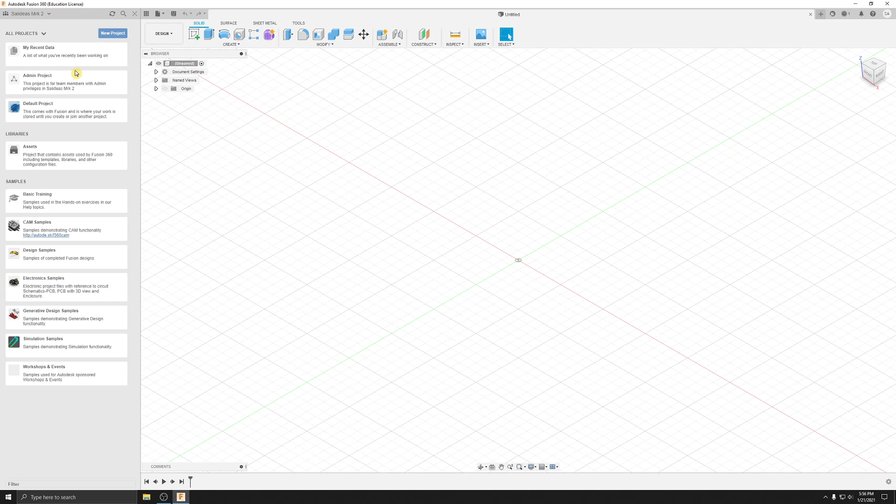progress. Okay, so how I have it here, I don't have this sidebar open yet to access the file from our previous lessons. I'm going to click here, show data panel, all the way on the top left corner, and then go into my project, and then open Arabic Design 1, Mark 1. Okay. Here's our design. Now we're finished with the design, extruding and making the sketch and everything. So we're done with that part.

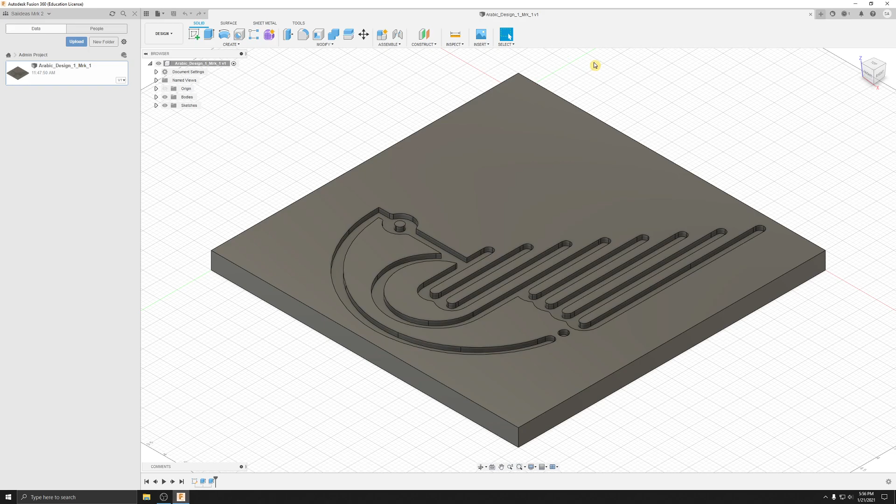So we go up to, again, our top bar, anything we want to do, tools or change our space. So we go here over to design, and we go down to manufacture. Okay. So you see how the bar changed. So the first thing is setup, and then here's our paths, and then there's other things that you probably will not be using. You won't be using multi-axis and stuff like that, but we will be using simulate, our post-process, and then our tool library.

You don't need to go into this anymore, but that's how I added the bits and everything. And if we ever get any new bits, then we would add it through here, but we don't need to do that. Okay, so we start all the way on the left side, and then we progress this way. My units are in millimeters, so I'm going to change that right off the bat. Oops, hover, click, okay. Inches, okay. Not going to make it my default, but you can do that if you would like, and then you don't have to change it again to inches.

So first thing I'm going to do is click setup. Okay, it automatically sets it as a milling operation because that was what we did before. Our stock point is right now set to the middle here. We want to set that to the top left corner, so we're going to select that. It automatically highlights the box point when you start creating a setup, so you can just click the points and that'll do that. Okay, so that selects that.

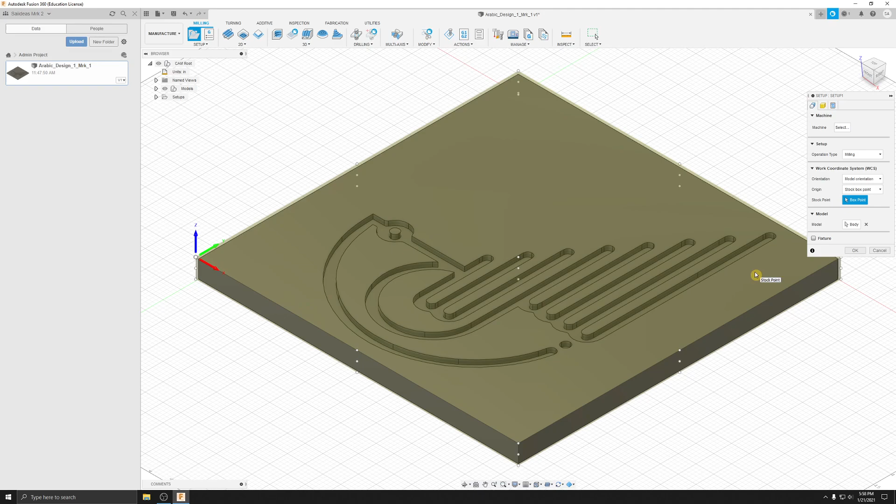It already knows our model, so we don't need to do anything else. You can do the model orientation, but the way we have it right now is correct, I believe. I sometimes forget if Y is supposed to be left and right, then X is up and down, but I think how we have it is correct. Okay, so we're finished with our first tab. We're going to move to the next one.

We're going to go to the stock, so that was setup, and now we're going to do the stock tab, so everything's working in this part for now. It automatically makes a relative size, and we're fine with that because we made our stock beforehand by making the rectangle in the sketch and everything. So what we're going to do is just take off the offsets because we know we put the exact size we needed when we were making the model. And so I took off those offsets, and that's all I have to do here.

So you see its dimensions are 9 by 9 by 0.5. So that's fine. We don't need to do anything in the post process, so we're fine there. And so that's it for our setup. Okay. So now, really simply, we're gonna go over to 2D. So right, we're in the setup section. Now we're gonna move on to the next one. It's pretty systematic. And if we're doing 3D pathing, then that's the next one over.

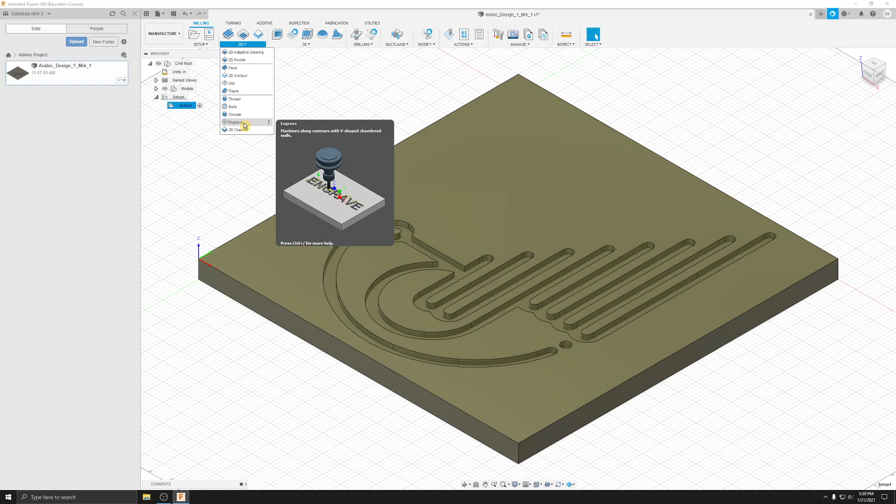Okay. But nope, we're just dealing with 2D right now. So I'm gonna stick with 2D. I'm gonna go down to the second from the bottom, engrave, and select that. Okay. Now, first thing it wants you to do is select the tool, so we're just going to move from the bottom down.

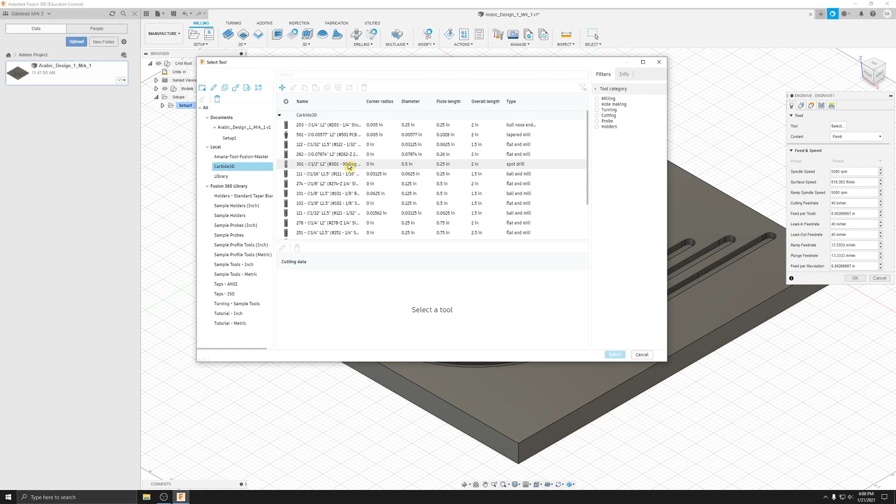We don't need to do anything with the feeds and speeds because we already have our tool library, so that already sets everything for us. So we're just going to select this, and then it's going to take us to here, but we want to move into our Carbide 3D library. I believe that the 90 degree is a 301. Yep, 90. So 301, 90 degree.

Click on that. That'll be on the box of the actual bit if you're not sure about that one, but you can kind of look through these and see. But you should start getting used to the numbers, like 301 for 90 degree, then I think it's 302 for 60 degree. And then there's like 102 or something for our eighth bit. We'll use that often. That's flat.

I can do a separate lesson just discussing what type of bits you would use for different applications. But right now we're dealing with engraving, so all you're going to do is use these V-bits, the 90-degree V-bit. Or you could use a 60-degree. You could see the difference if you wanted to. So all you would have to do is go down to 302 and select that. That's the only thing you'd have to do.

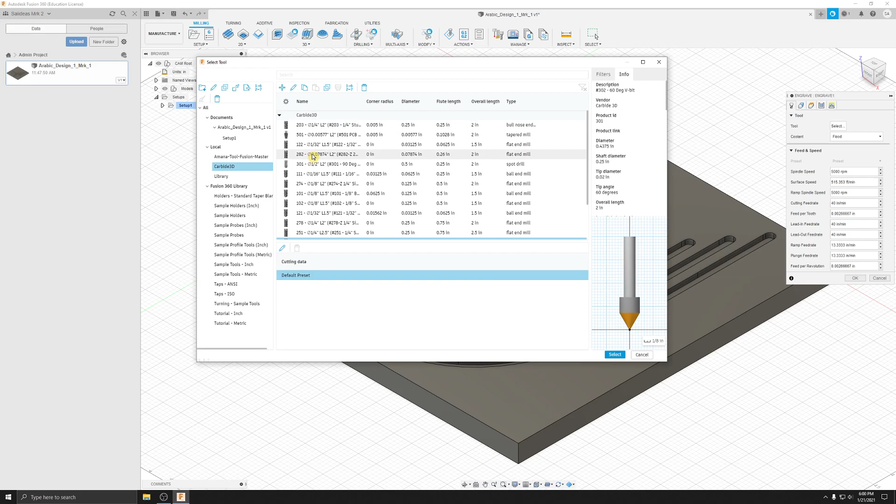Okay, but I'm going to stick with my 90-degree. I'm going to select that. And then it applies it, and you saw all those feeds and speeds change. So that's exactly what we want. Coolant disabled, it automatically does that for you because it knows we're going to deal with wood. It knows these carbide bits are meant for wood. You don't really need coolant for that. But for metals, where the bit will definitely get hot, you need stuff like water, air, different things like that.

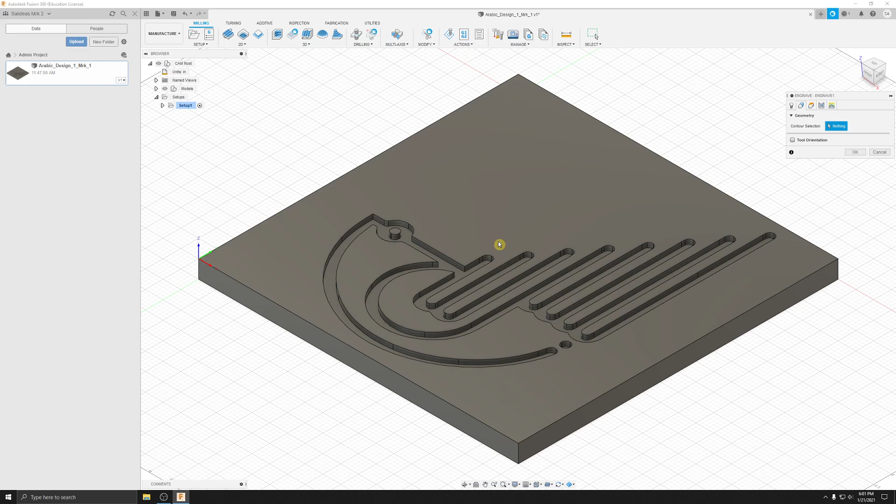Anyway, okay, so we're in our tools. We're going to move over to the next tab, geometry. That's where we start selecting where our cut's going to happen. I want to select the top edge for engraving. If you're doing an end mill, the normal flat, round ones, then we would click this bottom face. But it doesn't even let me select faces, because with engraving you can't do that. You have to select edges like this.

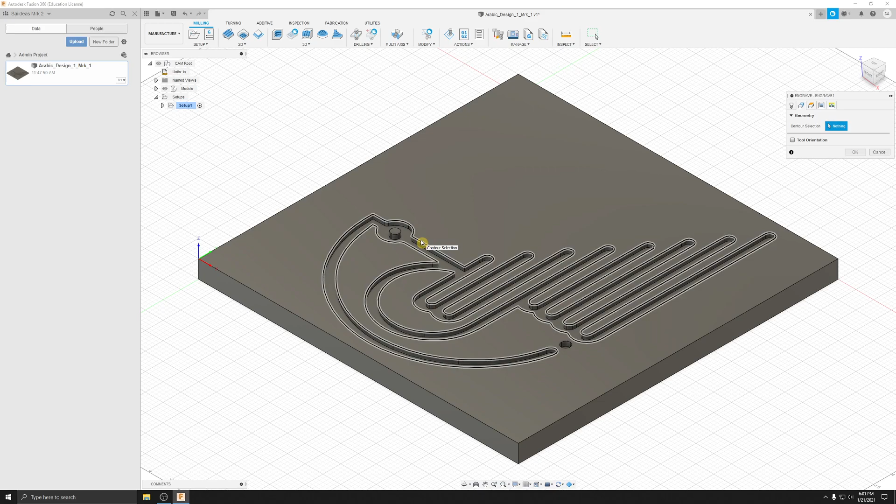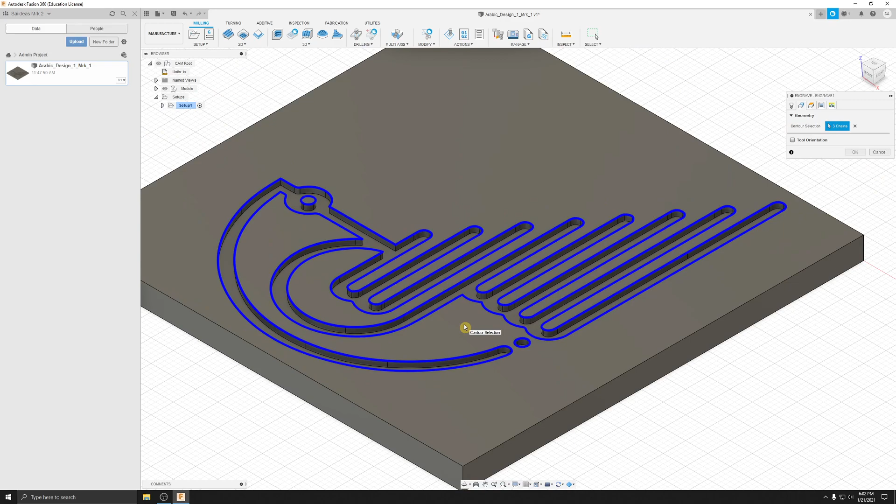So top edge, select that, and then I'm going to select this inner part here. Let me zoom in. It's just being a little annoying, but select. Okay, good. And I was mentioning something about arrows. Engraving, you don't need to deal with any of that. Then I'll select this here last. So there's no directions in or out or anything like that. So this is very simple, a great place to start to get used to Fusion and pathing.

So I selected this edge, then this one, and then this one. So boop, boop, and boop. Those three are selected. You can see here, 3 chains selected. Okay, and with engraving, they need to be continuous paths. We saw in the previous Arabic square one that there were breaks in it. First, it wouldn't actually let you extrude it anyway, but also the path wouldn't be able to be created, if that makes sense.

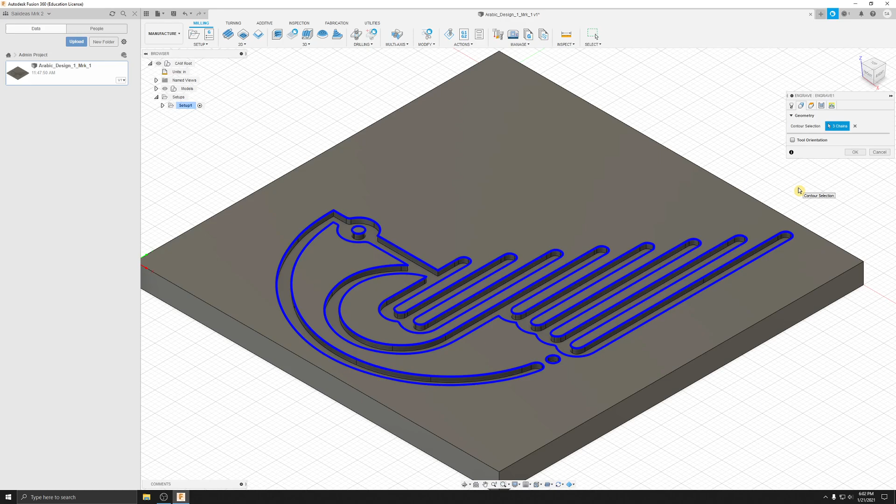Okay, so geometry is selected. Heights you don't need to deal with. It already kind of does it for you, but I can just explain it a bit here.

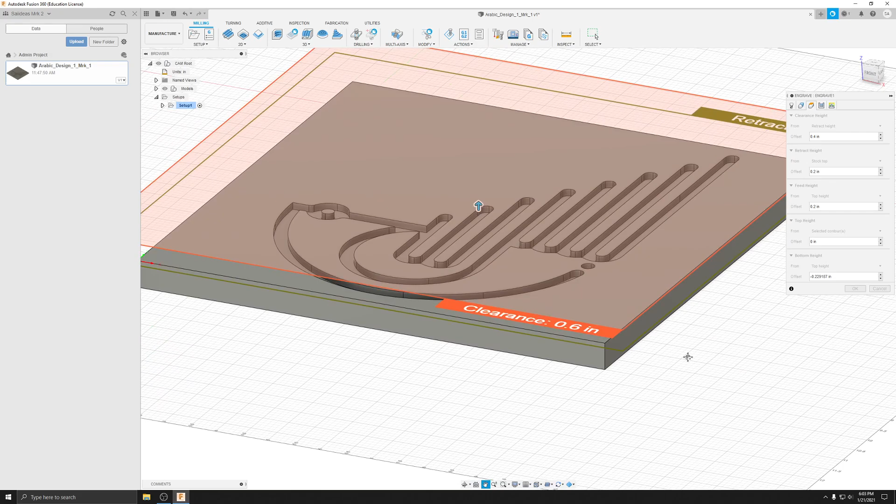So I just selected this, so it was like this, right? And I just went here and selected front so I could see the front. For engraving, there's only two kind of sections that you need. So there's the retract and then there's the clearance. Clearance is just how far away from the block you can get. That's like when it finishes, it'll go up to that height.

Retract is, for example when I'm pathing, it's going here and cutting along here, and it wants to move after it's done this and comes here. Obviously it doesn't want to go right into this cut here, so the actual bit will move up a bit, then move this way, then down into that cut, and then finish, and then go up to the finish.

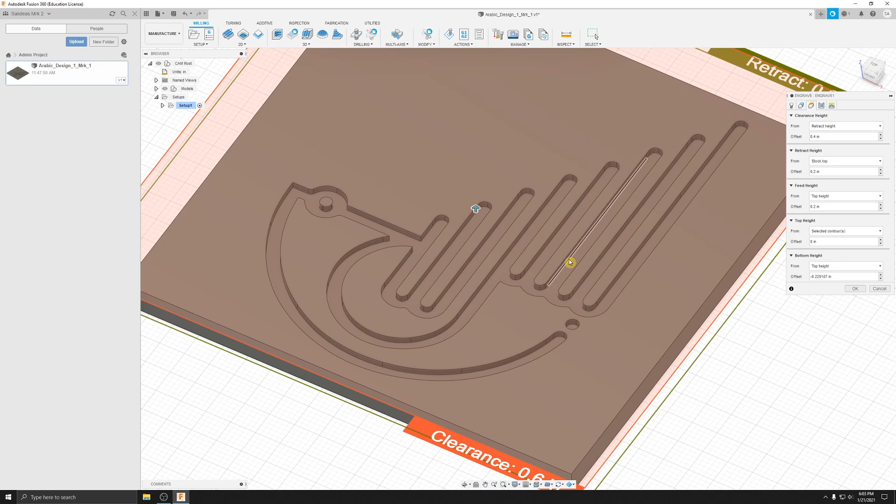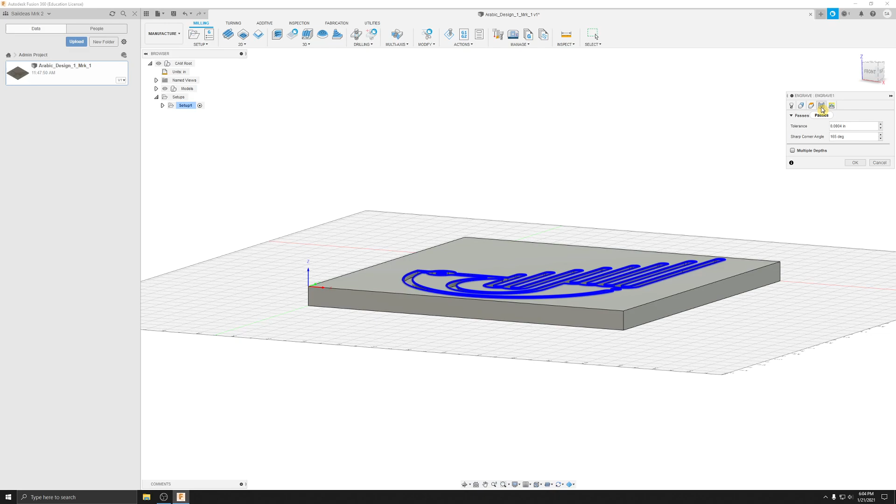So after it gets here, it goes up, then it'll drop into there to make that little dot cut, and then it'll go up and clear and go back to our zero or something. But we don't need to make any changes here. Just keep it default. Okay. Your tolerances are fine. Linking, you don't need to do anything.

So with engraving, I just go through these tabs, making sure I'm not missing anything. For the first tab, tool, select our tool, the 90-degree V-bit under the carbide library. We also have a 90-degree in the Amana. You could also select that if you wanted to, but we're using the carbide one. That automatically put our feeds and speeds in.

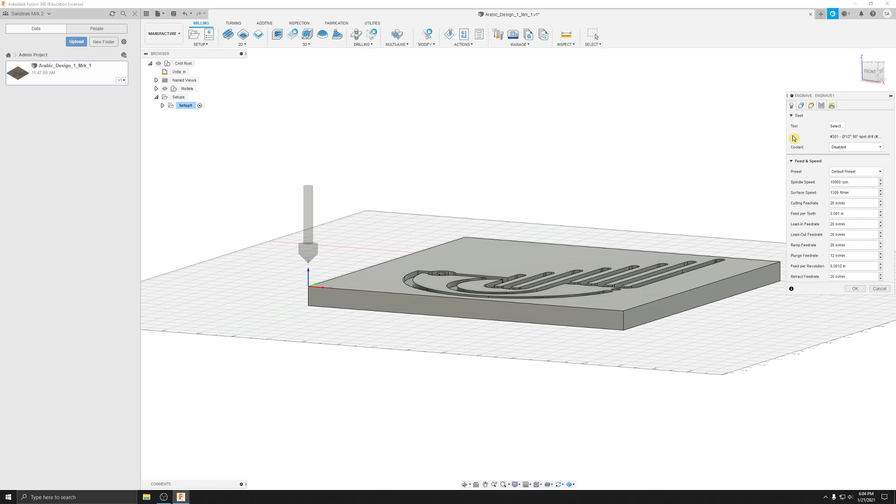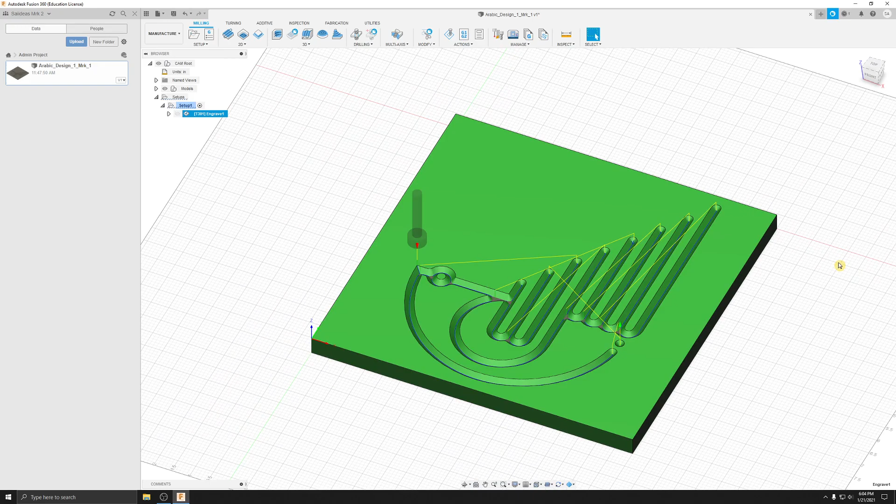Then the geometry, we selected our edges, so we selected this, and this little hole here, and that was basically it. After you select those, you press OK. It'll start generating the path, and bam, you've got your cut. This is a great starter example, because it's a very simple process and great to get used to the controls and get more comfortable.

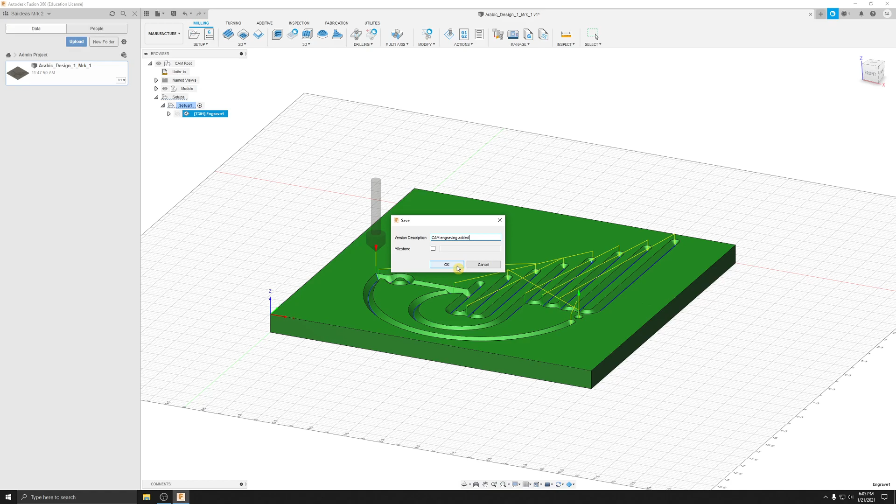So see, this is starred right now. It says save this, so we have this path saved. As a description, we can say cam engraving added. That's just for your references, somewhere you can read so you know what's different as you add versions. The first version was just a model, and now we added the cam engraving. Press OK.

So that's saved. Fusion is really good at automatically saving, so if you do forget, it just starts saving automatically. And if you want to see how it will be in action, you can go here. So remember, we started setup, then we went into 2D to the engraving, and then we selected our tool and the geometry.

That was after the setup, and now we don't need any of this 3D stuff, none of this drilling or multi-axis, no modify. We're going to go into actions now. Manage is for your tool library; we'll never deal with that. These bottom bits get you into the section you want to be. We're on the first tab, milling, then turning, and there's additive. Additive is like 3D printing.

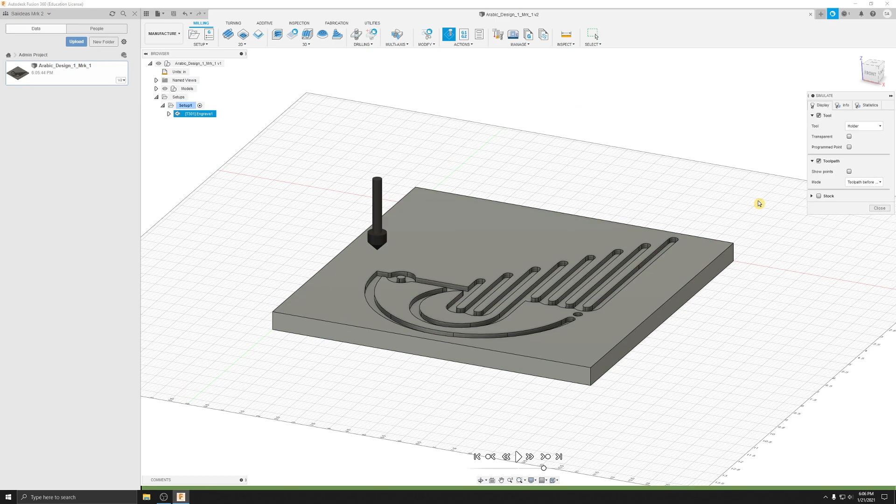Turning is a different form of CNC, kind of like a CNC lathe, if you can think of it like that. But we'll always be under milling, so get comfortable with this top bar. And I wanted to show you how to simulate. So in actions, we want to go into simulate, and the only thing I want to change here is to show the stock.

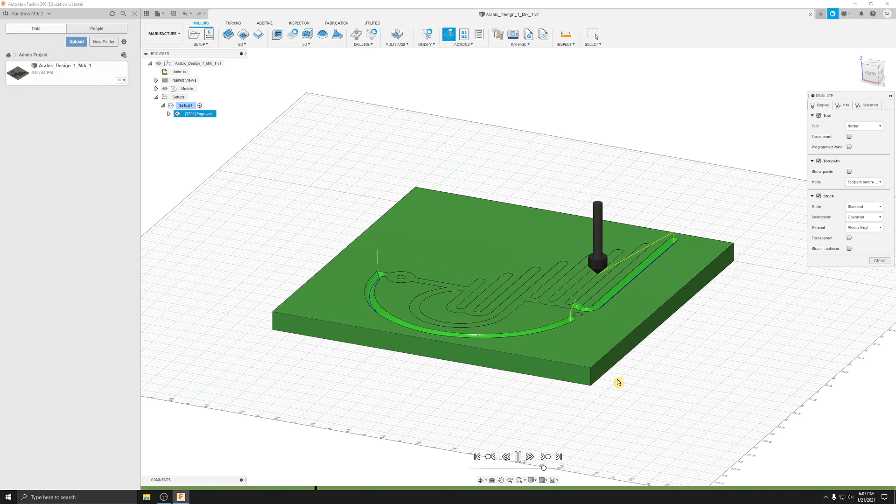So when it actually does a simulation, you can actually see the stock being removed, so it's really useful. So I selected that, and then you don't press close, you go here and you can press play and you can see the cut happen. And it's a good way if we're dealing with more complicated paths to just kind of see if there's any collisions or any interferences. So like if maybe the bit might hit a clamp or something, we can keep an eye on that.

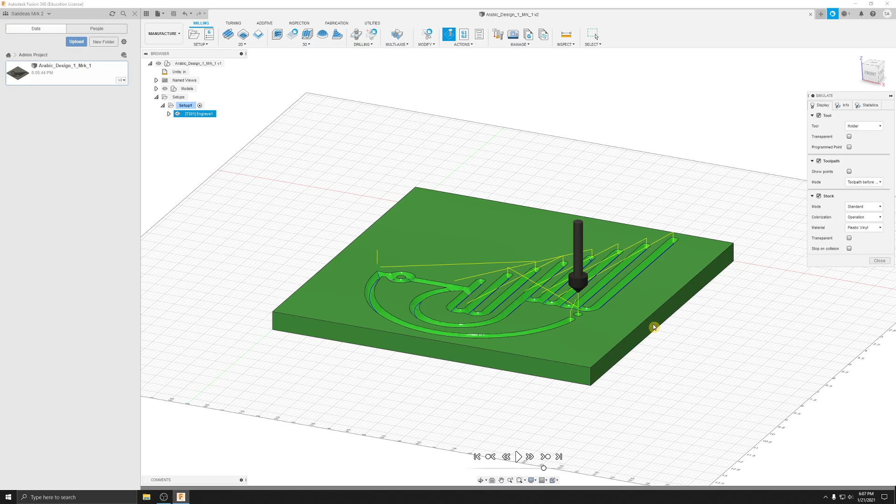It's always good to simulate, right? Before actually making the real thing. So yeah, it looks good. And then so this is the retracts I was telling you about. So once it makes a cut and it comes up this path, this is known as a retract. So this distance was that retract height that we were doing before, if you remember. I was showing you that. But yeah, so that's a simulation. It looks great, cool. And yeah, so we simulate that.

And then to actually just get our file out that we're going to send to the CNC machine, we're going to go over, so simulate, next to it is post-process. So it's like a whole flow, right, we moved this way to this way. We started setup, we did our path for the 2D engraving, we wanted to simulate, make sure everything's good, and then we move into our post-process. Now post-process, it looks like a bunch of complicated stuff, but it really is not.

Only two things you want to deal with here. You want to make sure this is on Carbide 3D Grbl. So if you go here and you just want to look for Carbide 3D, so under C, Carbide 3D, select that. So that just tells us that we're post-processing, we're sending this file to a Carbide 3D machine, so that all their config files and everything are set for that.

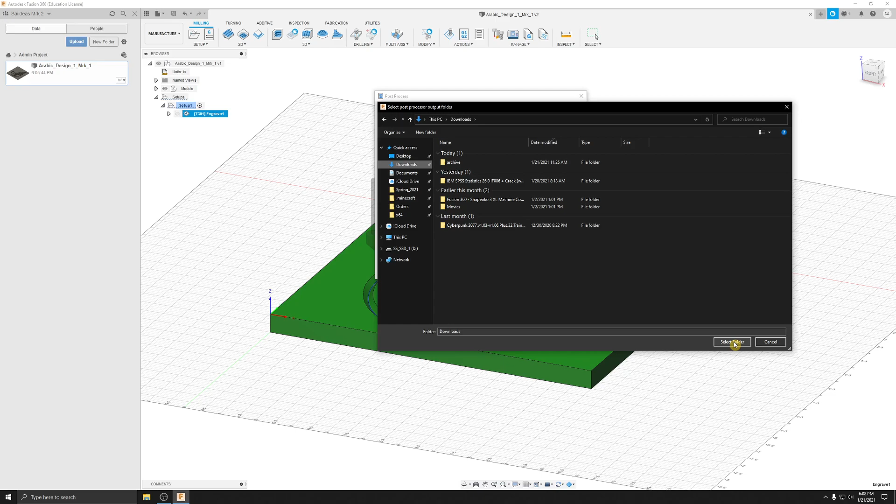And then the other thing you want to change is output folder. And so for now, I'm just going to send it to my downloads. If you want to make a folder or something where you want that to be, then make that, and you can make certain folders for different projects or whatnot.

And so yeah, we set that folder, and then this is like the default name it calls it, but this is just where you set the name of the actual file. So let's just call it what our file is called, Arabic_design_1_mark1. I make my names kind of complicated, but you can do whatever you want for that. So right, set the Carbide 3D, that's our post processor. Set the folder you want it to save to, and then set the file name, and then press post.

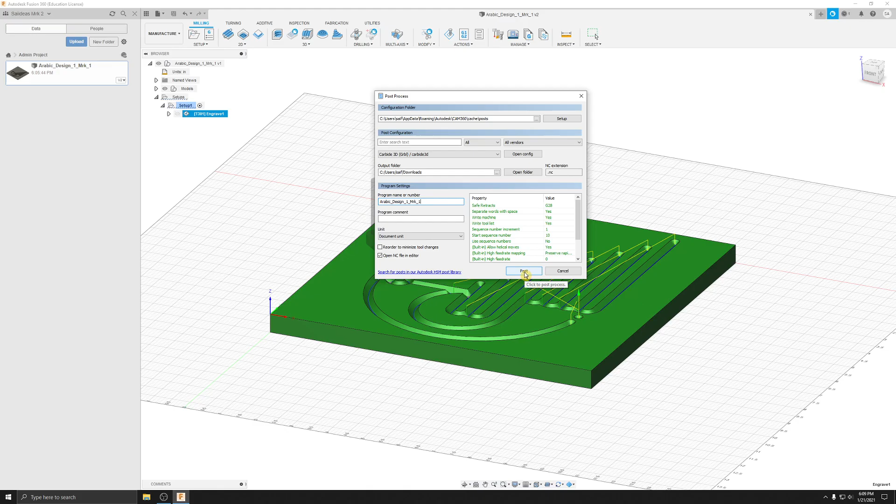And yeah, I have it automatically set to open in VS Code. So basically it looks super complicated, but it's not. You can uncheck that if you really want to. You don't need it to be open. But this is literally all it is. This is what is called G-code. So G-code is just some commands. So these commands mean sort of retract things and how to zero the machine before starting the job. And then you start going to the job, which is just a bunch of position data. So that's how it knows where to path, right? Where it cuts. So you gotta tell the machine locations.

So that's about it. And yeah, hopefully that wasn't too much information. I kind of went into some nitty gritty stuff about retracts and stuff, but maybe I'll do a different tutorial just going through the process with no extra explanations or anything, so you can just look at the process. But yeah, hopefully that was helpful, and we went through I think everything that I wanted to go through. So yeah, sounds good. Hopefully that helps.